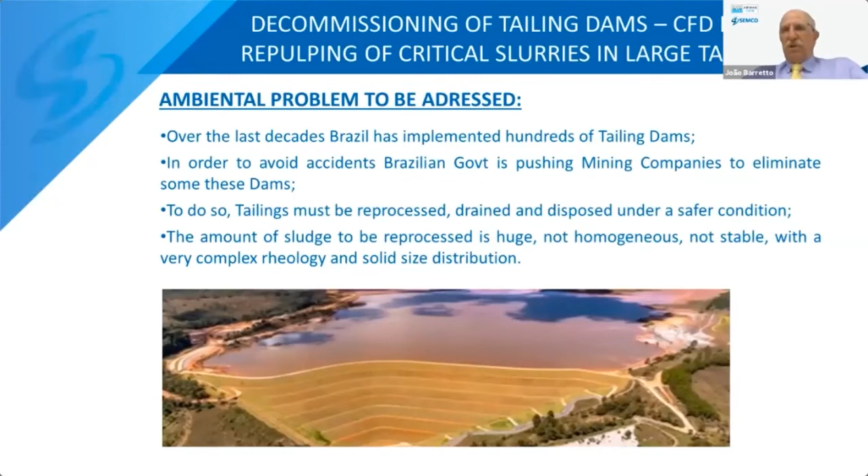The solids are not homogeneous, not stable, and with a complex rheology and size distribution. To do this, it's necessary to drain the tailing and dispose of solids under safe conditions and reuse the water for the process. One of the common solutions to drain tailing is to have a dredge inside the lagoon, pumping the slurry to a large tank with volume between 3,000 to 6,000 cubic meters.

The first challenge is not to add more water in the process, so the tailing slurry must have as much solid concentration as possible. Because of this, the design of the repulping tank goes to a large diameter and a small cylindrical height, in order to keep the pressure on the ground at an acceptable number. In other words, the agitation challenge is to guarantee homogeneity with minimum dead volume in a very complex rheology. Low power consumption is another important goal to meet CAPEX and OPEX restrictions and the green and ESG philosophy.

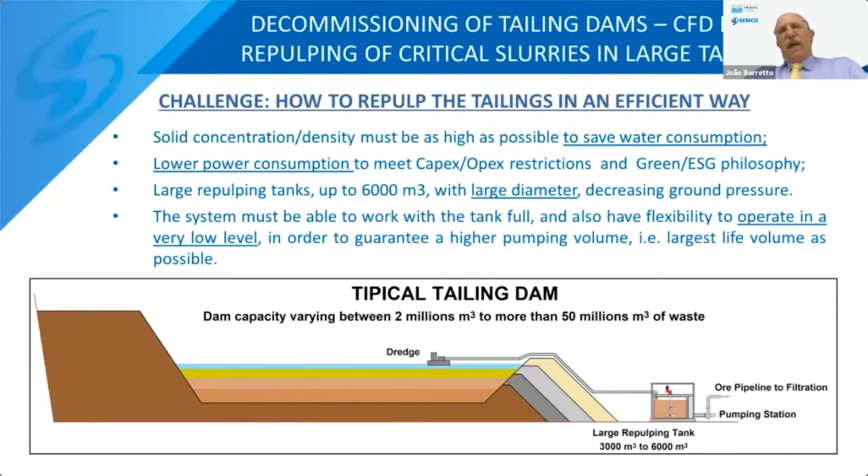With a traditional agitator, the approach goes to a common large impeller diameter, and this kind of agitator has many disadvantages, like high power consumption, a small pumping rate, and strong loads to be supported by the shaft and the drive. Narrow blades do not work well positioned close to the bottom. And also, it's not the best solution for high concentration solids in the slurry.

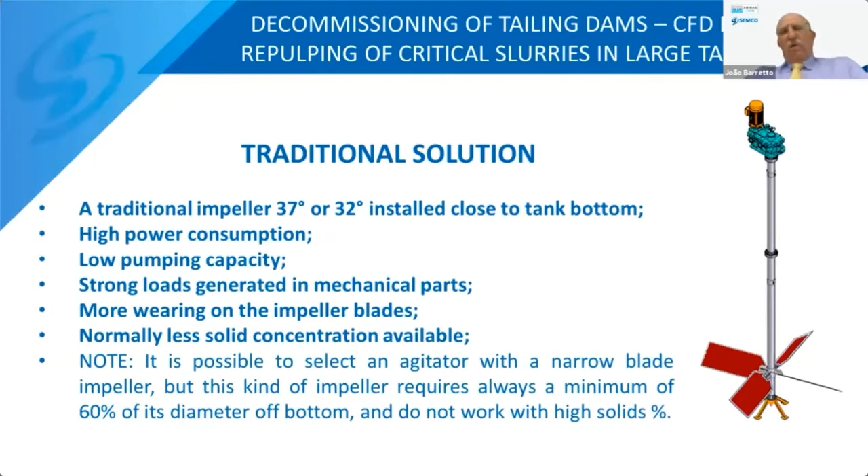With our customer, we defined some premises. The agitator has to guarantee a dead volume lower than 20%. The operation is to work with a high solid concentration and a design factor of 20%. Pursuing a reduction in energy consumption of 25% is another important goal. Repulping the slurry with maximum homogeneity in order to guarantee a perfect pipeline operation.

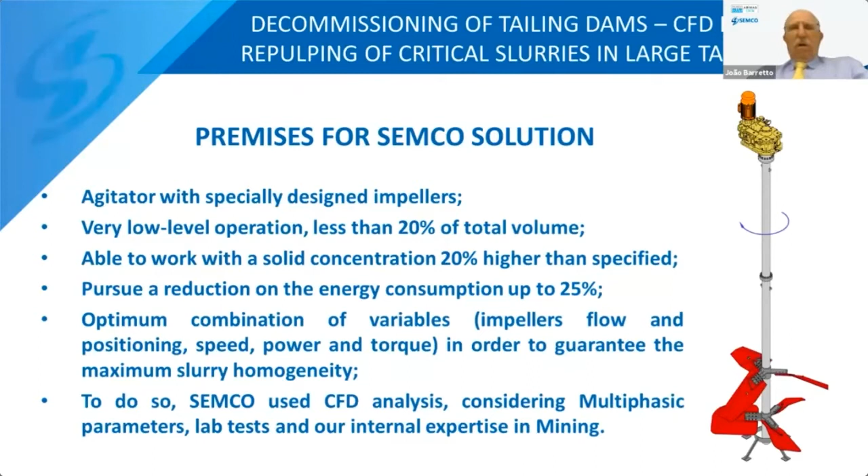To reach these premises, we used our R&D department using CFD considering multiphase parameters, also our lab tests, and our especially strong experience supplying real agitators for many pipelining stations. Developing this kind of agitator, we used field information that we could find in a project that we have for these applications, and we fed our CFD for a sequence of analyses. And we could find the best solution.

Two impellers: one wide blade, especially designed to operate close to the bottom, and a large high-performance impeller in the upper position. Optimal streamline distribution inside the tank, even with varied volume. A very small dead volume, a reasonably low power consumption, and also with the streamline velocity and acceleration, we could guarantee an operation with more than 70% of concentration.

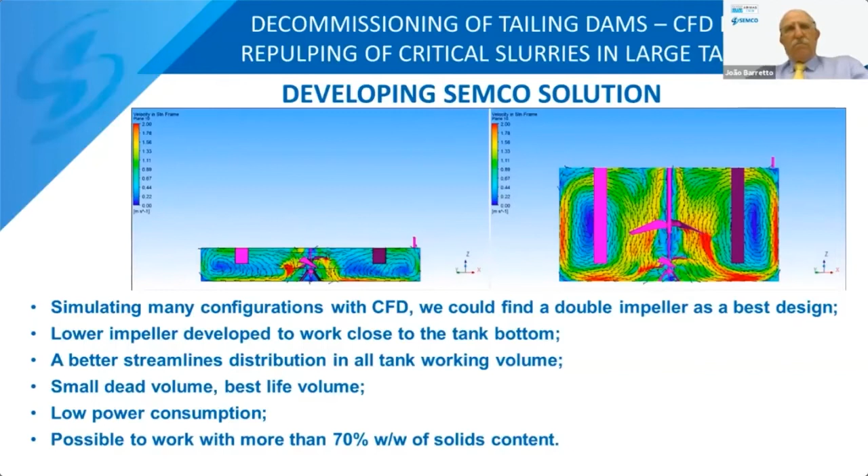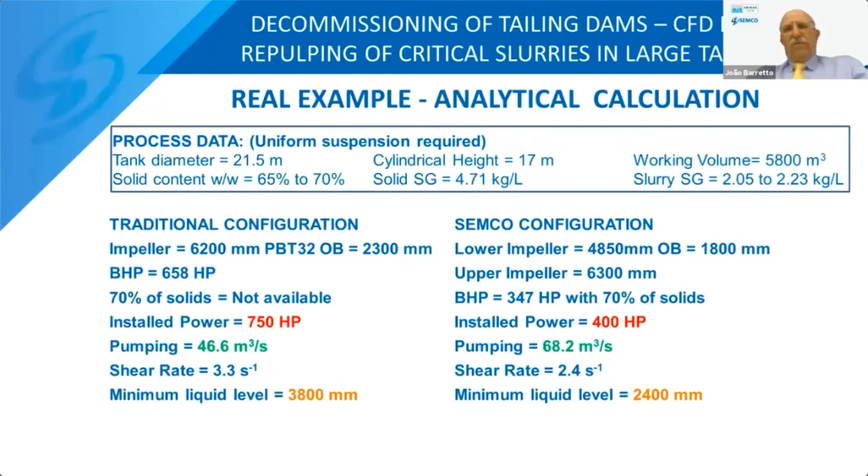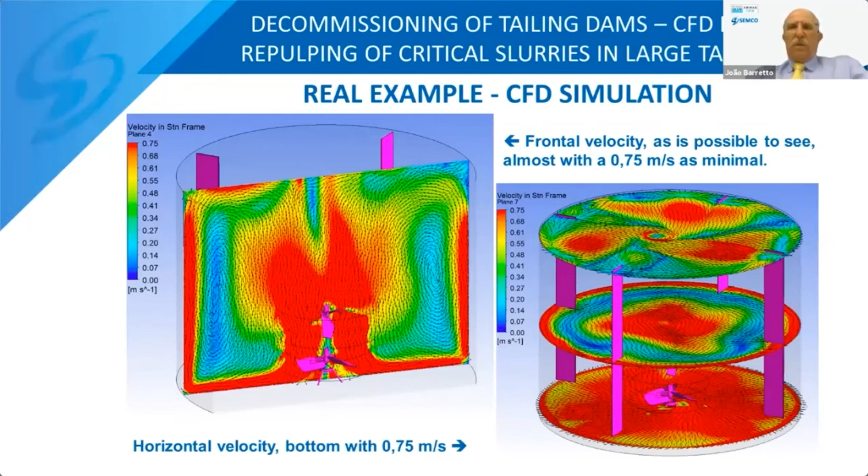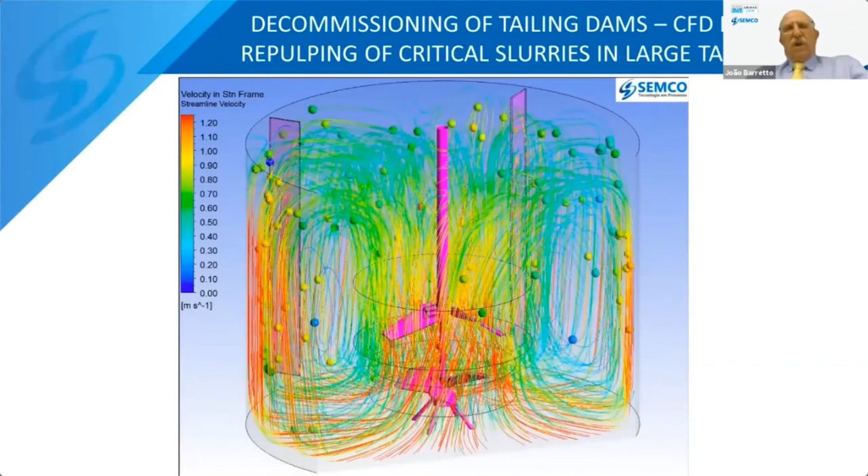Here we have a film showing the streamlines inside the vessel, where it's possible to see that most of the lines have a very strong velocity inside the vessel. This is like a tomography of the velocity vectors, where it's possible to see that we have most of the tank with 0.75 meters per second.

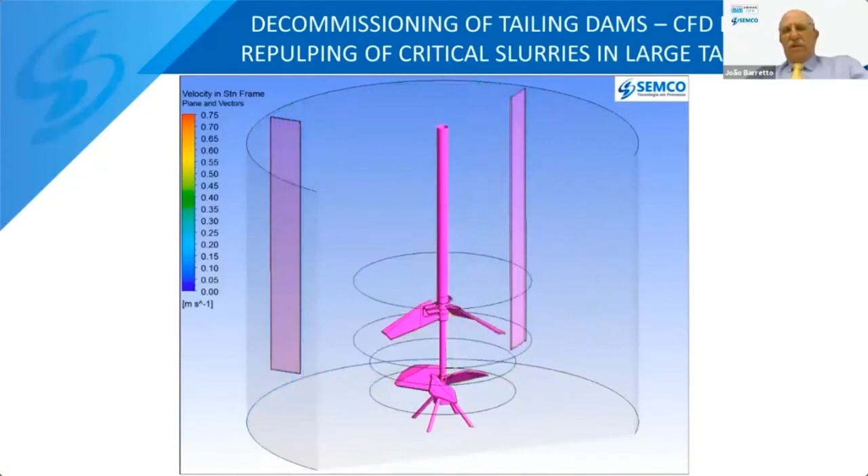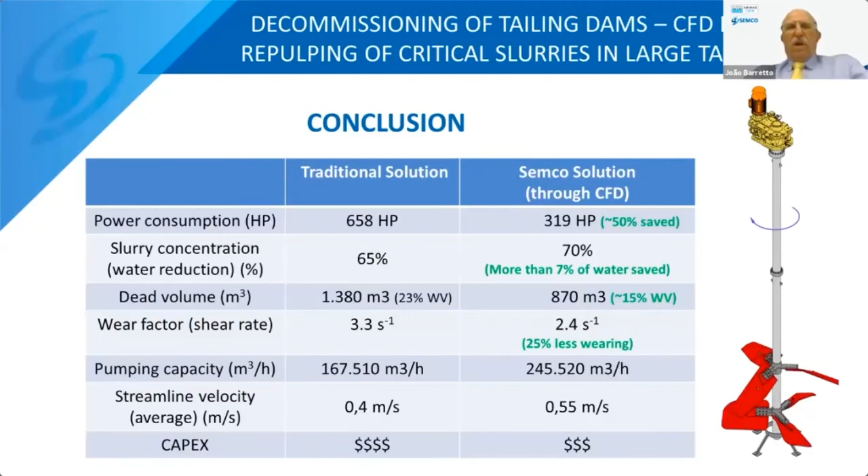In conclusion, we are saving 50% of power consumption. This is energy consumption. We are saving more than 7% of water. We have only 15% of dead volume, and we have 25% less wear because the shear rate is less than the traditional construction. Probably we have 25% less investment cost when compared with the traditional solution.